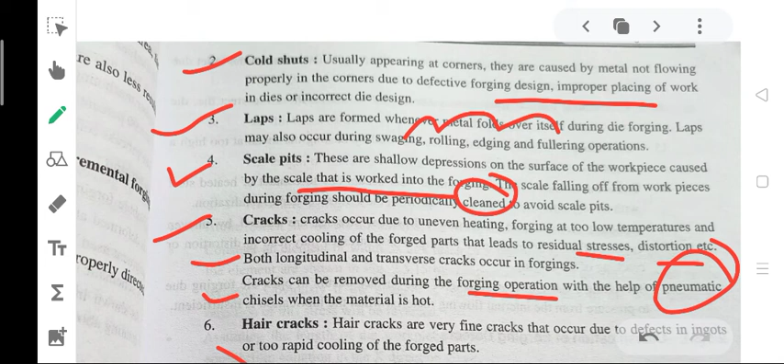Cracks can be removed during the forging operation with the help of pneumatic chisels when the material is hot. The next defect is known as the hair defect. Hair cracks are very fine cracks that occur due to defects in ingots or too rapid cooling of the forged part.

So this defect is known as hair crack.

Next defect is unfilled section. These are the result of a die cavity not completely filled during forging, and the causes may be insufficient metal, wrong placement of metal in the die, improper heating of the metal, incorrect forging design, defective die or defective die design, and faulty forging technique.

This defect is known as the unfilled section. The next defect is known as mismatching. Mismatching in forging is caused by lack of alignment of upper and lower die halves. This may be due to improper die, incorrect fitting of the die, or worn guides of the press or hammer used for this purpose. Next defect, the ninth, is the ruptured fiber flow line defect.

When will we get this defect? These are revealed by examination of microstructure, and are due to rapid flow of metal in the die. It may be due to improper design of the stages in forging. This defect is ruptured fiber flow lines.

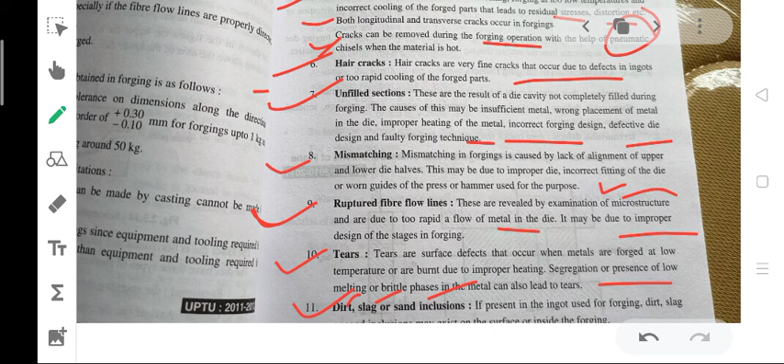Next defect is the dirt or slag defect. If present in the ingot used for forging, dirt, slag or sand inclusions may exist on the surface or inside of the forging. If there is dirt, slag or sand, that is this defect. Next defect is known as blowholes, honeycombs, and cavity defect.

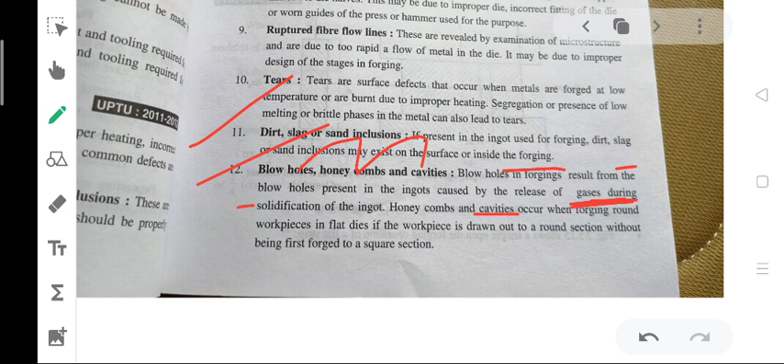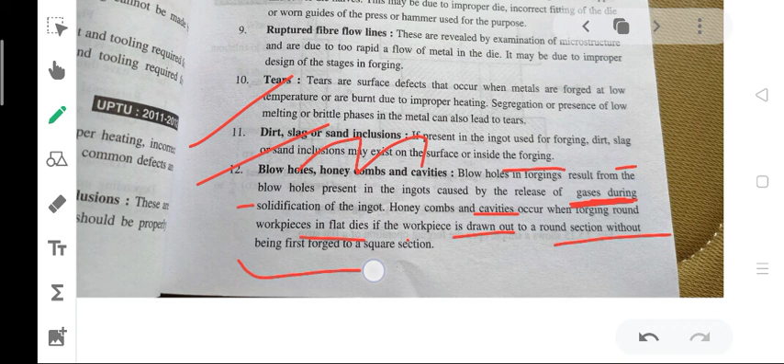Blowholes in forging result from the blowholes present in the ingot caused by the release of gases during solidification. And honeycombs and cavities occur when the workpiece is forged round in flat dies and drawn out to a round section without being first forged to the square section.

Next defect is known as the center burst defect. Center burst defects are ruptures occurring at the center of the billet due to the presence of segregation or brittle phases. Next defect, 14, is dimensions outside tolerance. These may be the result of incorrect die or die wear or mismatching die halves.

Defect 15 is burned and overheated metal. This is caused by heating the metal to too high a temperature or for too long a time. Defect 16 is decarburization. Decarburization of steel occurs due to contact of heated steel with atmosphere; then we get the decarburization defect. Carbon gets removed from the solid steel due to oxidation.

The 17th defect is residual stress and distortion. Residual stresses are caused by uneven cooling of the workpiece after forging, and these stresses may lead to distortion or cracking of the forging. The 18th defect is barreling. Barreling or bulging of free surface occurs in open die forging due to pressure from the internally flowing material when the lubrication is insufficient. So these are the 18 defects.

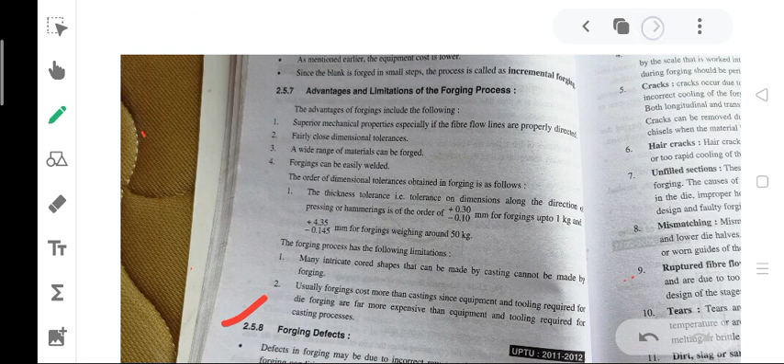The first defect was improper chemical analysis, abnormal structure and inclusion. Then the second defect, cold shut. Third defect is laps. Laps are formed whenever the metal folds over itself during die forging. Scale pits defect: the scale on the workpiece during forging should be periodically cleaned. Cracks occur due to uneven heating. Hair cracks are very fine cracks that occur due to defects in ingots.

Unfilled sections, mismatching, ruptured fiber flow lines, tears, dirt, slag or sand inclusions, blowholes, honeycombs, and cavities. And then center burst, dimensions outside tolerance, burned overheated metal, decarburization, residual stresses and distortion, and barreling. These are the 18 forging defects.

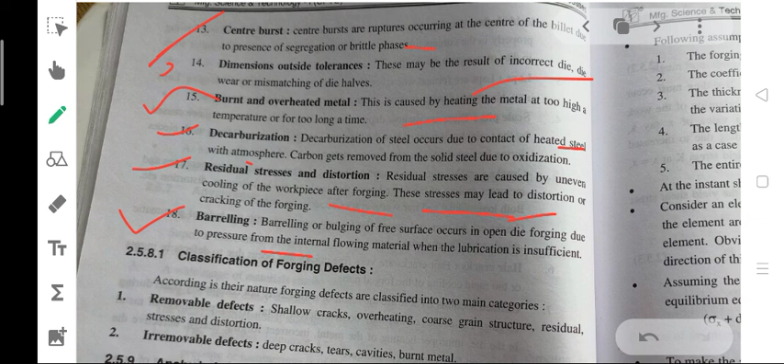These forging defects are classified into basically two types: removable defects and irremovable defects.

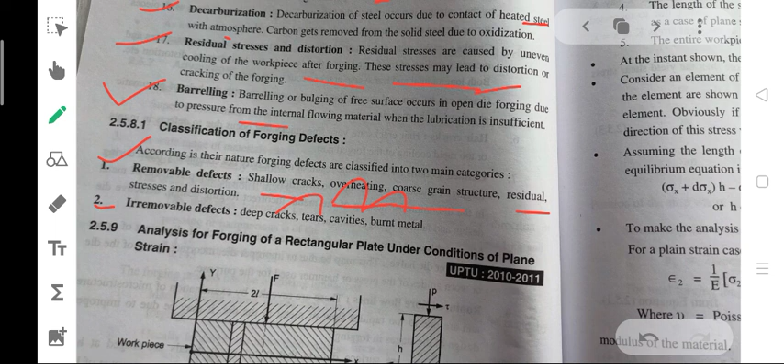Irremovable defects. These are the removable defects and irremovable defects.